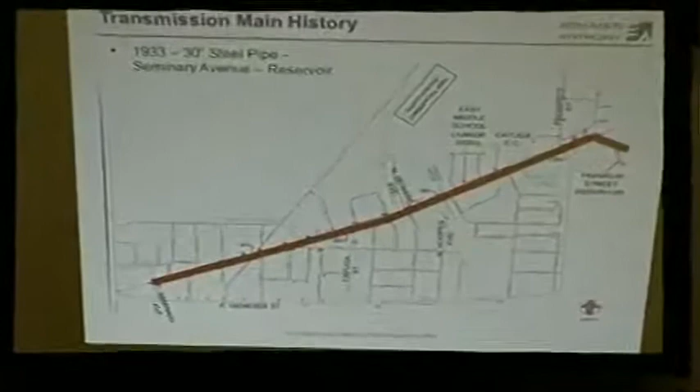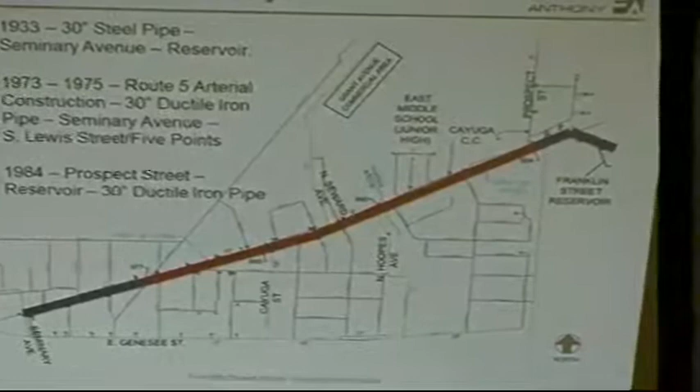Starting in 1933, there was a 30-inch steel water transmission main from Seminary Avenue to the Franklin Street Reservoir. In 1973 and 1975, the Route 5 arterial came through, and that segment highlighted in blue, from Seminary Avenue to Five Points or South Lewis Street, was replaced with ductile iron. The segment off to the east, in 1984 and 1985, from Prospect Street to the Franklin Street Reservoir, was also replaced with ductile iron. So remaining in the middle, the red segment, that's the project of today - the original 1933 30-inch steel water transmission main.

A little bit about your service area - it is not small. You serve the town of Sennett, Fleming, Throop, Brutus, Montezuma, Springport, Aurelius - the list goes on - Port Byron, Weedsport, Cayuga County Water Authority, Thruway Authority, all in total. I was a little quick with the button there, I think I can go backwards - pretty close to 45,000 people served.

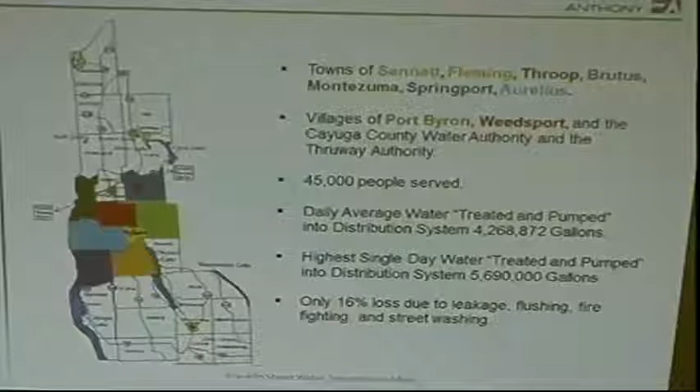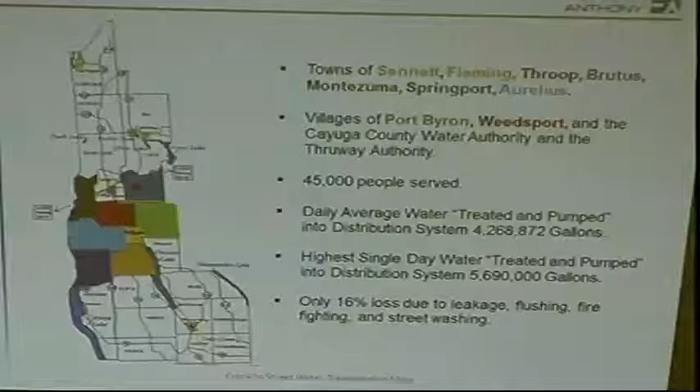On a daily average, you're pumping into the system a little over 4 million gallons a day, and in 2012 you had a peak daily water pumped into the system approaching 6 million gallons. One interesting fact - we deal with many water providers at Erdman-Anthony, some with losses upwards of 45, 46, 47, pushing 50 percent. The average is generally greater than 20% loss water. You're only at 16 - it's something to be proud of, that's a really good number, very good. Those losses are due to leakage, flushing, street cleaning, firefighting - really good number.

A little bit about the procurement schedule that Bill has operated under - it's really been pretty much at the speed of light. From the very beginning, with his request for proposal in April 2012, to where it was awarded to us in August, through construction.

During the scoping process, the City of Auburn Engineering Department requested that we consider rehabilitation alternatives, not just plain replacement. They wanted to make sure they were making the right moves, so they asked us to consider both, and we did.

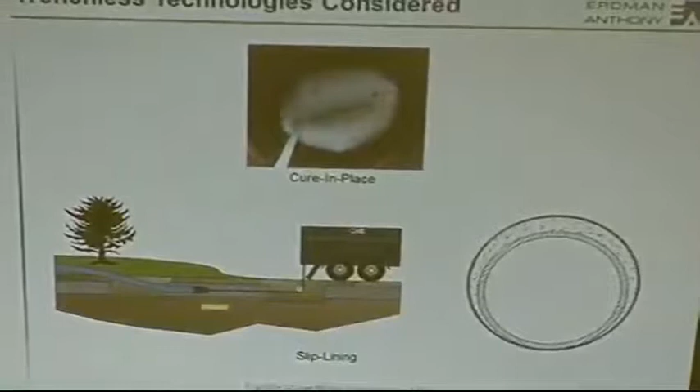On the rehabilitation side of things, when talking about a buried utility, the term trenchless technology comes into play. Basically, we're not digging to get at the pipe - we're doing it from above, from entry and exit pits. We considered two options initially. One was a cure-in-place option, which is basically a polyester fiberglass sock that gets essentially inverted and pulled through the pipe, then pressurized with either steam or hot water to cure it inside the host pipe - the host pipe being the pipe originally installed in 1933.

That option proved to be very pricey. There were some logistical elements to it. We didn't rule it out initially, but eventually we did.

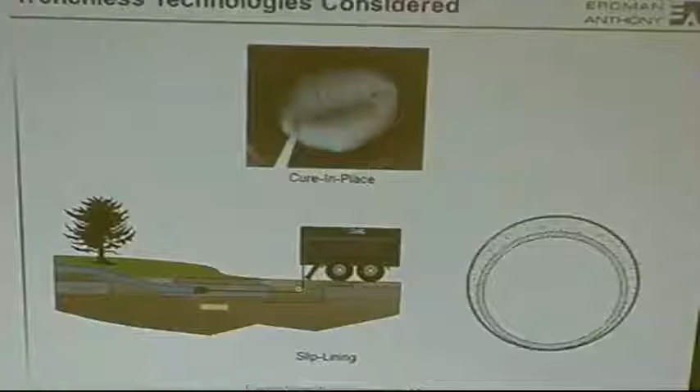The rehabilitation alternative we looked at more closely is called slip lining. We have a winch attached to the back of a vehicle, and the piping is assembled at grade and fused together. You take it from the surface down inside a receiving pit and pull it through the existing pipe. The cross-sectional view shows that pipe being pulled through the host pipe, with the annular space grouted with cement.

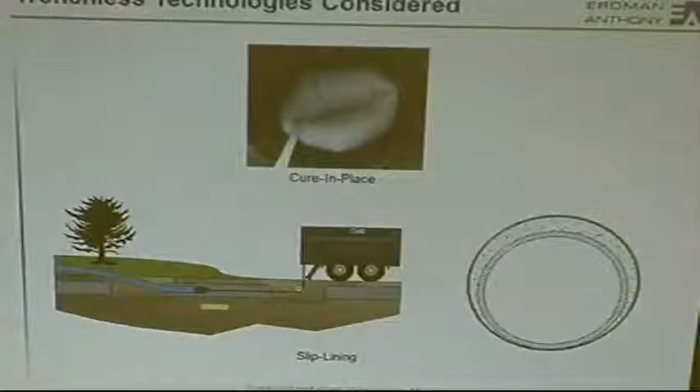Bill definitely wanted us to take a look at some different material options, and we did. We considered high-density polyethylene, HDPE. We considered ductile iron pipe, which is what we selected. And we also considered polyvinyl chloride, PVC.

HDPE we ruled out pretty quickly. The benefits of using HDPE come in a more rural setting. It's fused together in long lengths, could be 300-400 feet at a time, and either pulled or rolled into a trench. Down Franklin Street, given the numerous underground utilities that cross the trenches we have to navigate, we ruled that one out pretty quickly.

PVC we considered. There's pluses and minuses to all materials. PVC is one of the pluses, it's a little cheaper, but some people who manufacture PVC will argue with you till they're blue in the face, as blue as their pipe. It can be point loaded, and when it fails, it fails catastrophically. You get a small crack, it tends to go right down the pipe and could enter into the next stick of pipe. That's not the reason why.

There's many reasons why we selected ductile, but it's more important to talk about why. Number one, it's tough to beat. Number two, it resides on both the east and west sides of our project. The City of Auburn is familiar with working with it. Tommy Gayback and his guys have the necessary tools because they deal with it every day. I don't know if 100% of your system is ductile iron or cast iron now, but they're used to it.

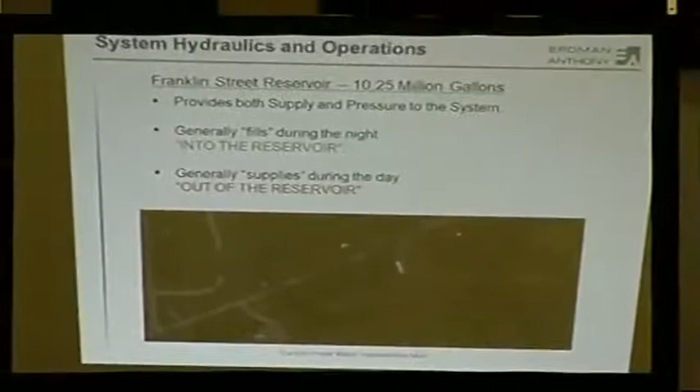A little more about your system. It's important to talk about the Franklin Street Reservoir. It is at the east of the project, at the city line. It's 10.25 million gallons in volume. It's important to note that that reservoir is not only a supply and storage of water, but also a source of pressure. It provides pressure back on the system.

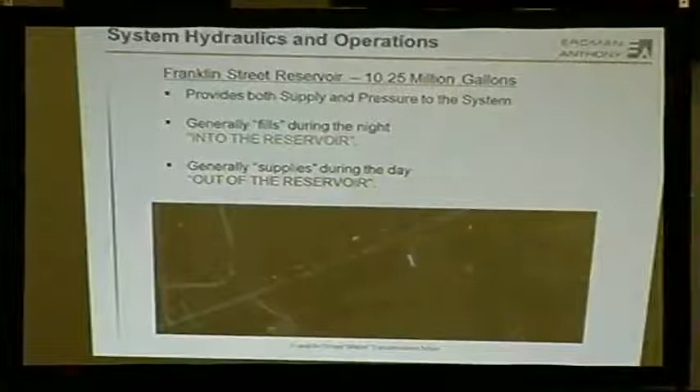Operation-wise, in its most simplistic form, at night it fills up. During the day, when water usage is greater, water tends to flow out of it. But there's only one pipe that hangs on the edge of that conduit, this 30-inch water transmission main, and it's bidirectional. It's water in and water out through the same line.

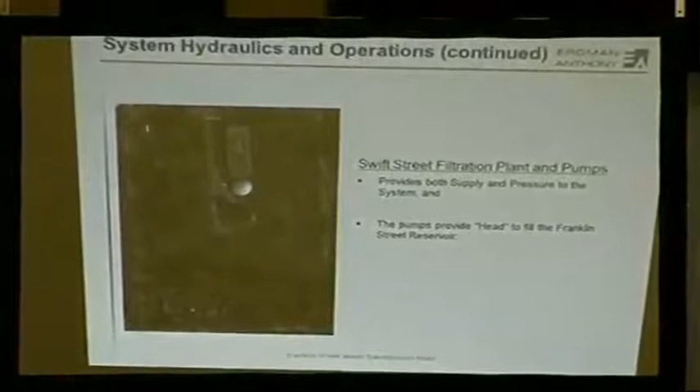The Swift Street water filtration plant and pumps is another important component of your system. What's important to know is that they're running 24/7. When they're not pumping water and it's being used, it's pumping water into the reservoir. That's the way the system was designed. Those pumps also provide pressure and flow to the distribution system and to the Franklin Street Reservoir, and provide the necessary head to pump water to the highest point in the system, which is the Franklin Street Reservoir.

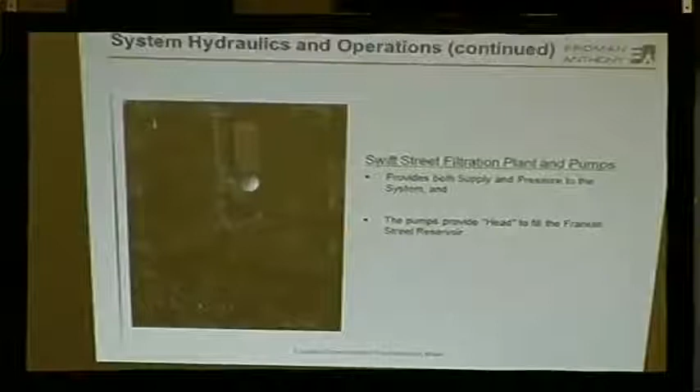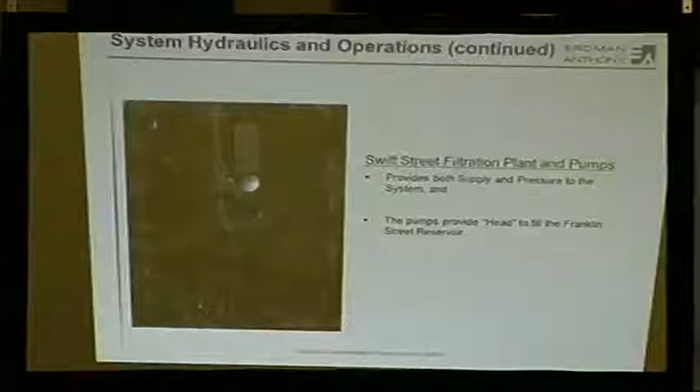Another important thing to note about the Swift Street water filtration plant and pumps is that because they can provide pressure, it does allow for maintenance or short durations when you can take the Franklin Street Reservoir out of the system and things still operate, with basically nobody knowing it's happening. So there's been some points in the project where we've asked Anthony DeCaro to change how he runs the filtration plant a little bit so we can shut portions of that transmission line down so we can work with it.

Throughout the design, we asked ourselves three questions often, and one additional that I didn't write down. How do we keep that Franklin Street Reservoir operational? How do we minimize its downtime during construction? And how do we continue to replenish the water in that reservoir? The fourth question, the one I didn't write down, is how do we rehabilitate a line, take it out of the system, and continue to flow water to that reservoir? I'll cover that more as we go.

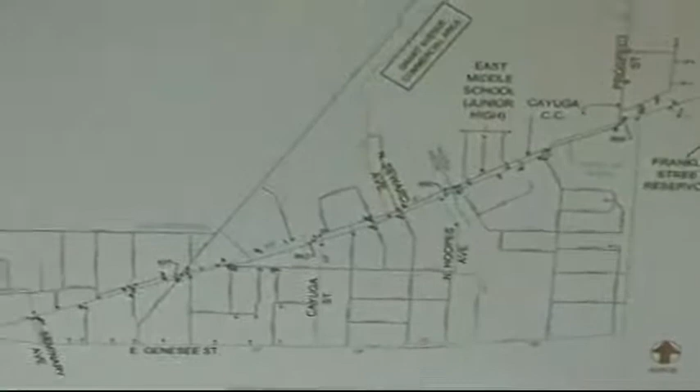To answer those questions, we did some hydraulic modeling of the system. If we need to rehabilitate the line, or take a portion of it out of service for an extended period of time, we still have to put water back in that reservoir on a daily basis. So we had to look for other pathways to get the water there.

The first pathway we looked at was large side street connections. North Hoopes Avenue is the largest and closest line to the reservoir, and it's 12-inch in size. So basically we said, let's not allow any water to go down the transmission main, let's only let water go up Hoopes Avenue. It wasn't enough, so we continued to look.

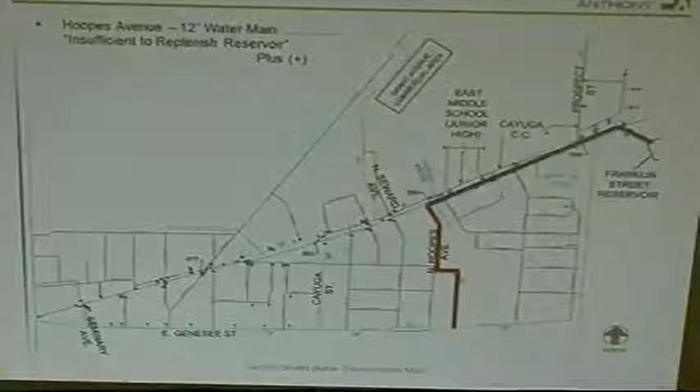The next largest main that hits the water transmission main in Franklin Street is North Seward Avenue. It's also 12-inch. The model said no good. It still wasn't enough, the two lines, Hoopes and Seward. So we continued to look.

And then we come to Cayuga. That's a 10-inch line. At that point, the model was yielding some favorable results. So that's important to the alternatives that we were preparing to evaluate.

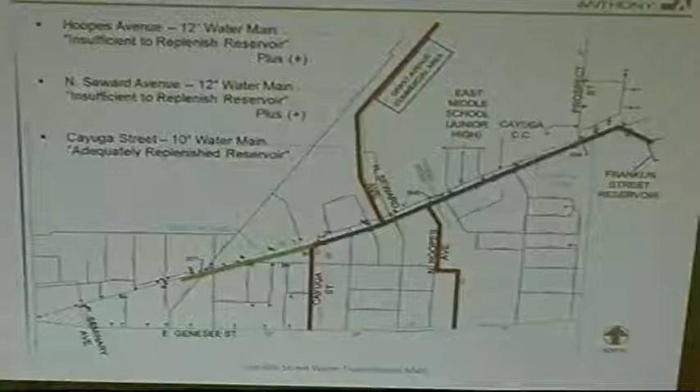Knowing that those three lines were sufficient according to our model, we knew that this last segment there in green, from 5 Points up to Cayuga, was the only section we really could consider for rehabilitation alternatives. The segment in blue would have to be installed new. The assumption is when you're installing new, you're leaving the old one there and using it while we're installing the new one and preparing it for use.

So I talked about the model a little bit. We like them, we like to think they're always right, but we know they're not always right. Whenever we get a chance to test them, we do. So that's what we did.

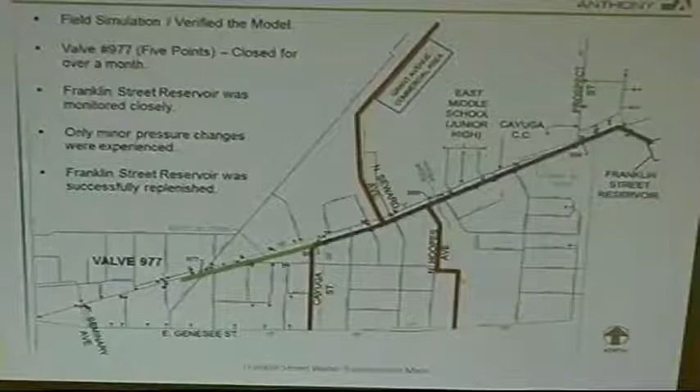We simulated taking that segment out of the system. We did that by closing valve 977, down there in the lower left - a 30-inch gate valve installed around 1974, 1975 when the arterial went through. By closing that, the green segment was out of the system. So now the filtration plant pumps kick in, the water hits that valve and has to find someplace else to go. We assume that water went to Cayuga Street, Hoopes Avenue, and Seward. We knew we had some help from the small 6-inch lines, but the majority of the water was assumed to be coming through that line.

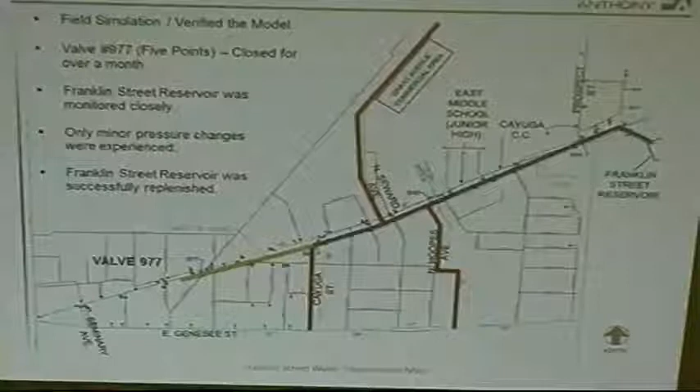So we asked Anthony, Tommy Gayback, and Bill to close that valve for us, and they were hesitant at first. I said, well, let's just close it for a day. So we closed it for a day, and things were okay. They said, now what? I said, let's leave it closed for 2 days. So we left it closed for 2, and 3, and 4, and then a week. Then we did 2 weeks and 3 weeks, and extended that to a little over a month. Anthony was able to make small adjustments, and he only saw minor increases in pressure throughout the system. So we were satisfied that if a rehabilitation alternative proved to be beneficial economically or for other reasons, we could be confident that we could actually do it and remove that segment from the system while we did it.

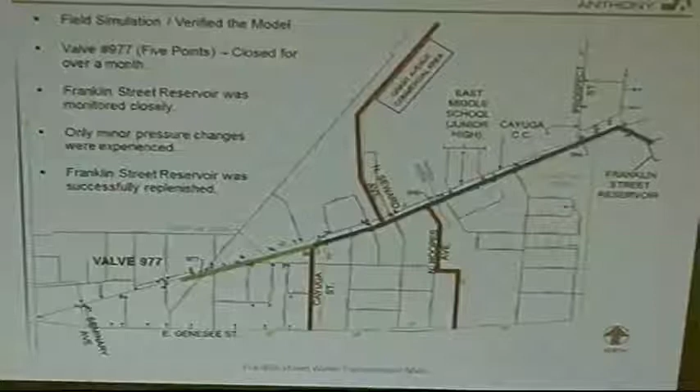So real quickly, we developed two alternatives. Alternative number 1 was new pipe from Cayuga to Prospect Street and rehabbing Cayuga Street to 5 Points. Alternative number 2, quite simple, new pipe all the way from 5 Points to Prospect Street.

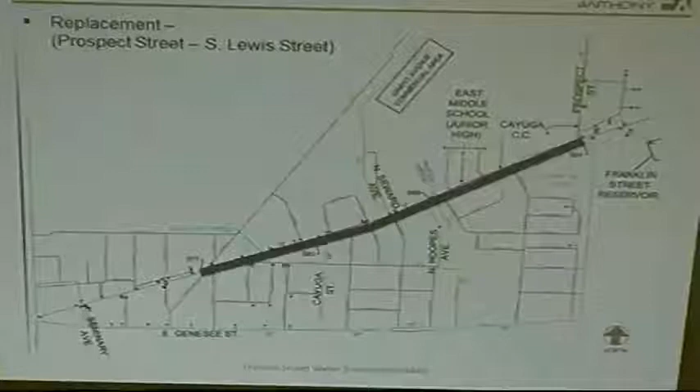We developed opinions of probable construction costs for each of those alternatives. Alternative number 1, with rehabilitation, was less expensive. Alternative number 2 came in at $3.865 million. The difference between the two was only $35,000, so we felt it was pretty much a no-brainer. Bill and his staff agreed: let's put in a new pipe all the way. For $35,000, let's get it new, let's not mess around with a rehabilitation alternative.

And that alternative came with the recommendation to use ductile iron pipe.

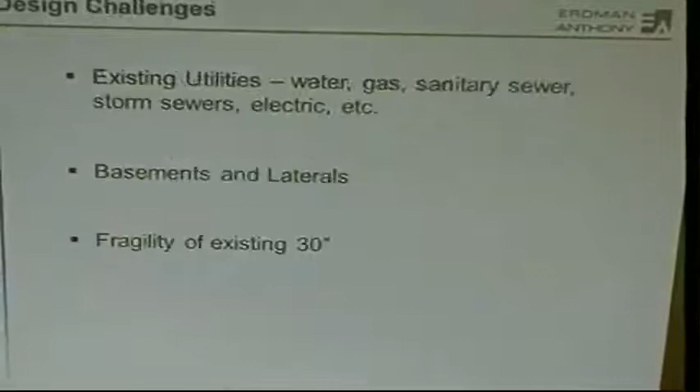There were some design challenges along the way. I don't want to spend a lot of time here, but existing utilities are everywhere, crossing our trench every 5 feet - water services, gas lines, gas mains, gas services, electric, telephone. Most of the electric and telephone were around the poles, but there was plenty of gas and water, and sanitary sewer laterals were a big concern for me from day one. I found myself in every basement along the north side of Franklin Street to locate them, to be as confident as I could be with where they were located, and made a determination of whether we could successfully install the 30-inch pipe generally within the Franklin Street pavement without disturbing them.

There were a few isolated laterals that I was nervous about, so we designed parallel sanitary sewers just in case. During construction we were able to navigate all of them, so the sanitary sewers we included in the contract proved to be unnecessary. We just dug a little deeper to get underneath the laterals, so we saved a few bucks there.

Another concern was just the fragility of the existing 1933 steel transmission main. You know better than me, but I did see it repaired firsthand on 2 occasions in the short duration I've been involved in the project, and I know it's been a headache, becoming an increasingly bigger headache as time goes on - the frequency of repairs necessary is getting more numerous each year.

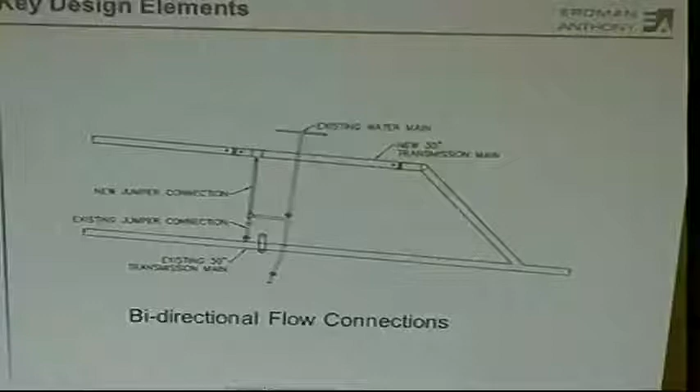So those were key design challenges. Here's a key design element that I think you'll agree is important. We call it a bidirectional flow connection. When we're installing the new main and we finally cut it over and connect it to the existing, we need the ability to quickly reconnect the side streets, and that doesn't happen in a day. So here in red, working from the text on the bottom, let's just pretend that that's Cayuga Street.

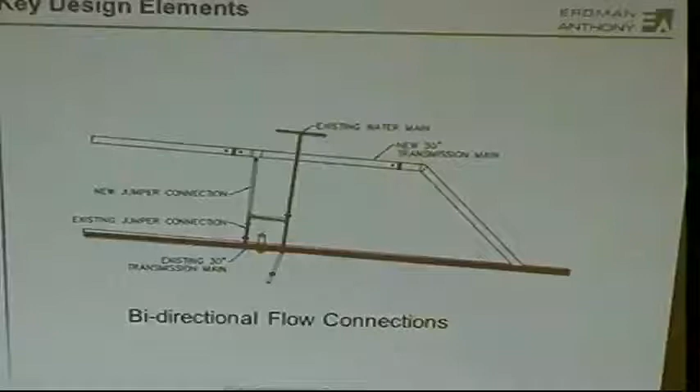Water's traveling from the bottom of the page up, and then it goes to 2 places: either to the water main on the north side of Franklin Street, or through the jumper connection, tying to the existing 30-inch steel transmission main. The piping referred to as new jumper connection, we prepared those connections prior to what we call the stage 3 cutover - that's when we actually connected the proposed to the existing at Prospect Street. By installing this jumper connection piping ahead of time with strategically placed valves, the water can quickly go the other direction and be on its way to the reservoir. We had 3 of these connections: one at Hoopes, one at Seward, and one at Cayuga.

There are 4 critical points that concerned me, that maybe I lost a little sleep over while it was happening. The first was installing the pipe only 7 feet away from the existing transmission main between Prospect and Marvine. We were prepared - we required the contractor to have repair materials should we rupture a hole in that line or have something catastrophic happen, to minimize downtime. But we installed that line from Prospect to Marvine with no failures, no leaks. So that was success number 1.

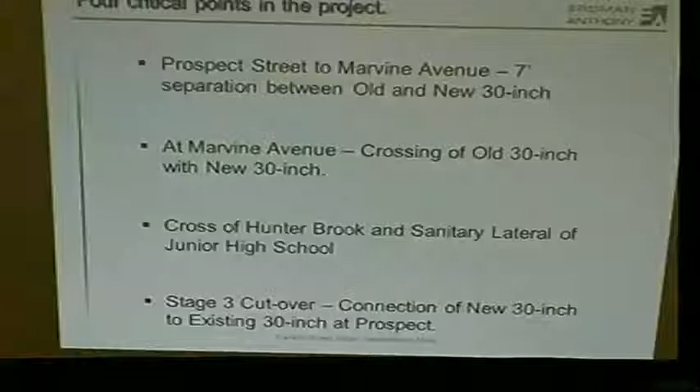Success number 2 quickly followed. At Marvine, the existing line travels from the north side of the Franklin Street pavement at a 45-degree bend, then 45s again and hops underneath the southern sidewalk of Franklin Street, staying there all the way to the church near Capitol. So crossing it was a bit of a worry, but we went under it, not over it. The existing line is generally buried 4 feet deep, and our proposed line is buried 4 feet deep to the top of it, but at that point we dove down deeper and went underneath it successfully. That piece of pipe actually looked brand new - we know much of it does not, because I've seen it firsthand with the repairs - but that section, you wouldn't know it was 1933, at least on the outside.

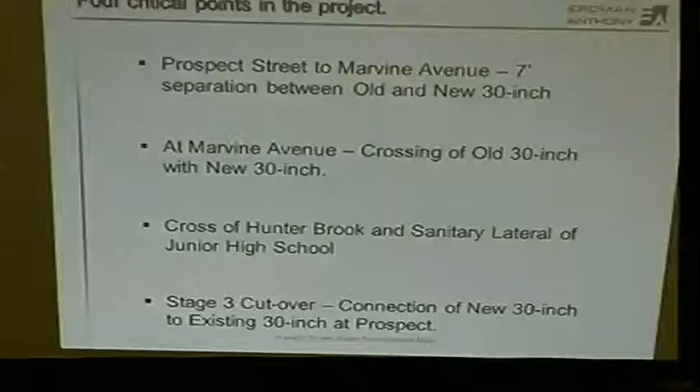The next critical point of the project was Hunter Brook. Anytime you're crossing a stream, river, or brook, there's concern. The existing line goes over the top of that box culvert at Hunter Brook, and so does the new one. At the same time, there's an important lateral to the junior high school that we had to cross - that was number 3, and we did that successfully. And then the last one, also done successfully, occurred on January 20th - what we refer to as a stage 3 cutover, the connection of the proposed to the existing at Prospect Street, or just west of it.

We can talk more about the details of that cutover, and I have some nice pictures of it. They were taken at night, since most of the work ended up being done at night. So that's a nice topic for discussion if you have questions.

Real quickly, I mentioned that Bill's got us moving at the speed of light, and it didn't stop from the beginning. We advertised for bid on July 15th, opened bids on August 7th of 2013. The council approved that construction contract on August 15th, and construction began this past November.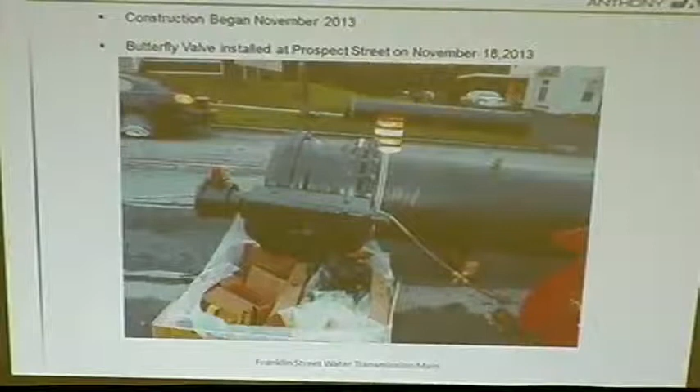And the first piece of pipe that went in the ground, the first accessory that went in the ground, was a 30-inch butterfly valve just west of Prospect Street. That is the butterfly valve there. If you can see it on the left-hand side, something that looks red - that's just to get you oriented. That's the nut that opens and closes the valve from the surface.

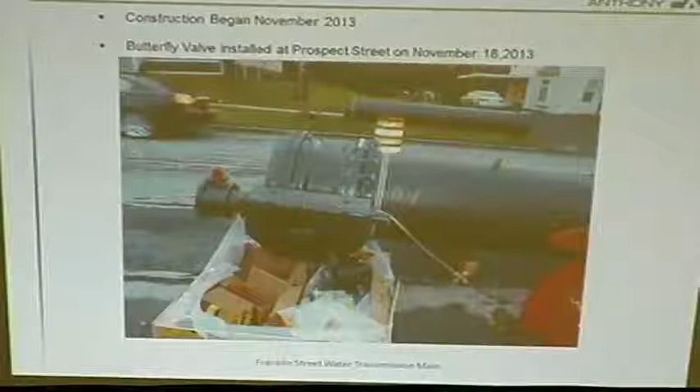We selected butterfly valves. They're substantially cheaper, but they work excellent - probably a third of the cost of a gate valve. That valve is attached to the first stick of pipe, and it nicely has number 1 written on it. A nice thing about the butterflies is they don't build up anything in the seats like the gates do. And another nice feature is there's not a bypass valve needed to equal pressure - you essentially get equal pressure on either side of the butterfly, so anybody can turn them. You don't have to be concerned about turning the wrong one at the wrong time.

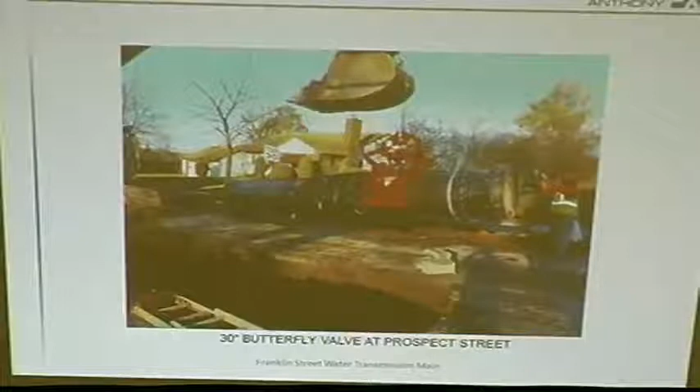So this starts a string of photos, and generally speaking they're in order, but no sooner do I say that than a picture will show up in the wrong spot. There's that stick of pipe - sticks of pipe roughly vary from 17.5 to 18 foot 11 or so in length, you might get one that's 19, that's just the way they're fabricated. But there it is, being lifted into place just west of Prospect Street.

Hopefully these pictures are showing up for those of you in the audience - we can always come back or look at the presentation later, I can leave it behind. This photo is looking easterly, and we're probably 3, 4, maybe 5 sticks into the work at this point, and there's another stick being set into place.

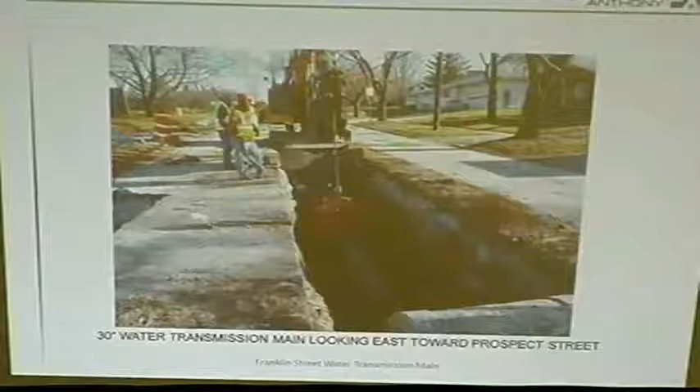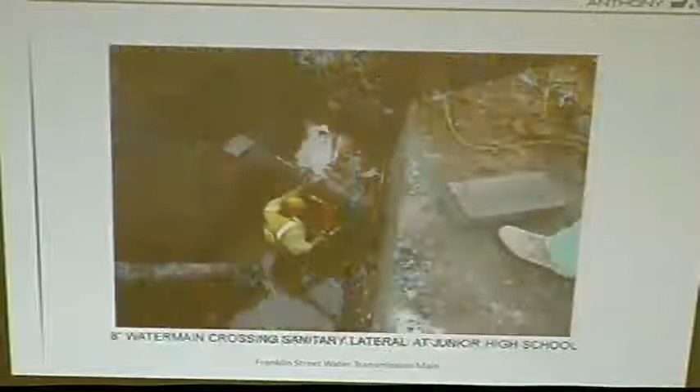Here's a photo that's slightly out of order, but we had to include it. This is work that occurred earlier - the crossing of Hunter Brook, but it's not the 30-inch transmission main. We had to relocate the existing 6-inch water main to make room for the transmission main, and we replaced that section of 6-inch with 8-inch, then connected to the existing 6-inch on either side. When we did that work, it also had to navigate its way by the lateral for the junior high school. That's what's pictured here - it's a little hard to see, but that guy's got his hand on the sanitary lateral coming from the school, and at his back is the water main that's angled 45 and down to get adequate bury and adequate clearance between the two pipes.

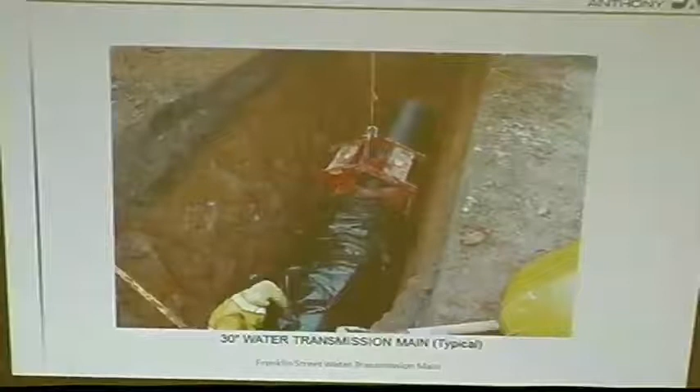I apologize, not a real exciting photo, but a stick of pipe is a stick of pipe, and this is another stick of pipe. It is 30-inch, and I can't tell you exactly where it is, but I think it's somewhere around Marvin.

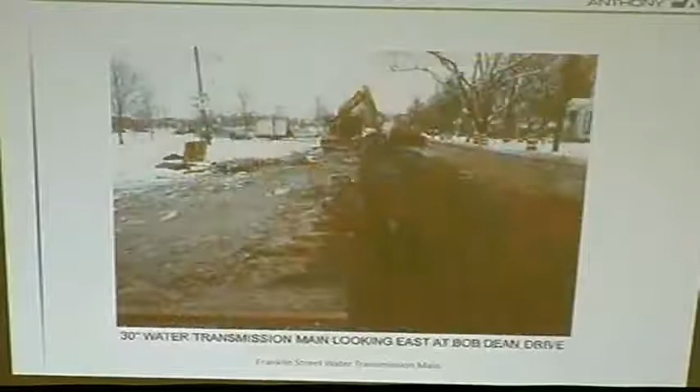We've had some weather conditions to deal with - you can see as the snow comes and goes. But again, we're in the vicinity of the college, and we stay in front of the college for a little while. They've got a few parking lots there, so some of these photos are - well, this one's labeled Bob Dean. Right there on the left is Bob Dean Drive.

And in the background of that photo, we backfill the trench with sand around the envelope around the pipe, then rather than change materials, from the top of the sand which is buried 1 foot above the pipe, we come up with crushed stone. That's the material we'd use for subbase under any driveway or roadway pavement, and we take that material all the way up through the subbase of the road, which the asphalt will be placed on top of. That's what they're installing there in the background of that photo.

And boy, the guy in the trench is disappearing, but he's in there and looks like he might be installing the next rubber, the gasket inside the pipe.

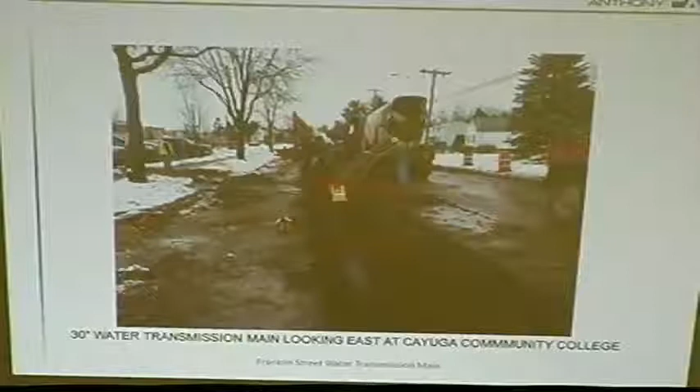Again, we're still at community college, but now we've got a concrete truck in the photo. Anytime we're closer than a standard distance to a storm or sanitary sewer, the contract requires that the pipe is not only wrapped in polyethylene, but the joint is also concreted and fully encased if we're closer than standard to a storm or sanitary line. That's what's occurring there, and I've got some close-up photos of that. Not too exciting, but that's what's happening.

I mentioned we have lots of utilities crossing. They're standing on top of the new 30-inch that's poly-wrapped and at least a third of the way backfilled, and dealing with what's probably a gas line that maybe was staked out inappropriately. At any rate, it looks like they're fixing one that was broken on their way by.

Just to get you oriented, at this point in the project, we're at Hoops Avenue.

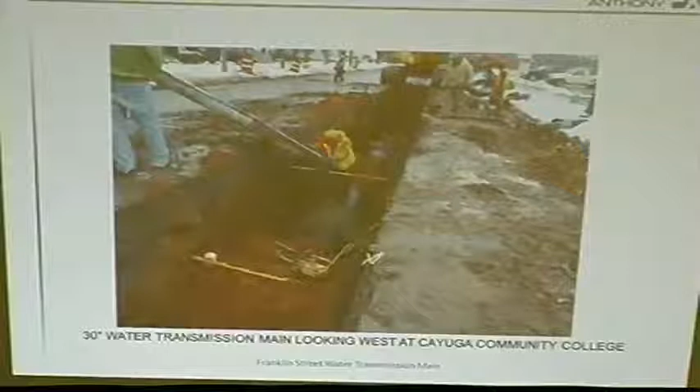Production's really been very nice for the city, for the contractor, for Urban Anthony on the design side. I'll tell you what my guess was: 80 feet a day. I know what the contractor's guess was: 100. They've had days that exceeded 160, 180. I think their average is somewhere between 140 and 160 feet a day. So things have really gone very nicely as far as installing lengths of pipe and getting good production. That's a really good number.

May not feel like it as we drive down Franklin Street, but things are actually progressing very nicely.

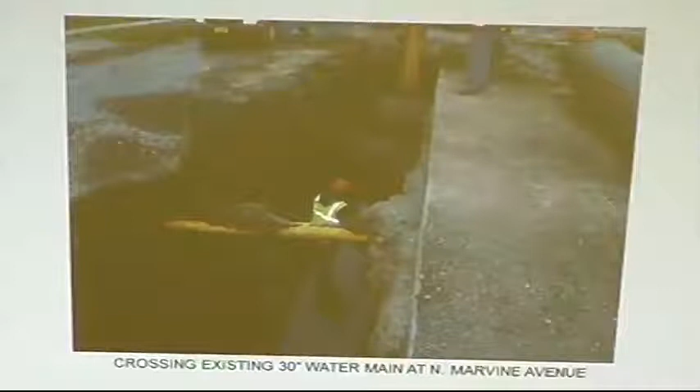That's not a good photo, boy. It looked a lot nicer on my laptop. Just in front of the bucket of that excavator at the top of the photo, this is the crossing of the existing 30-inch with the new 30-inch at Marvine. You can barely make it out in that photo.

There's just a concrete joint, fully encased in concrete. They don't backfill those joints until that concrete is there, and we vibrate that concrete to make sure it gets down and fully under, to make sure that joint is fully encased. The idea is additional protection from potential contamination from a storm or sanitary line. It seals and stabilizes.

Stage piping at the school. I don't know for certain, but I think that valve is potentially a service valve for the school. The school is the only customer connected to the transmission main, both the new and the existing, and there's two of them that basically loop into their property. So we maintained the only customer that was serviced from that transmission main, which is the school. Everyone else is off the water main, including the college, and they have a second feed, I believe, on Prospect Street.

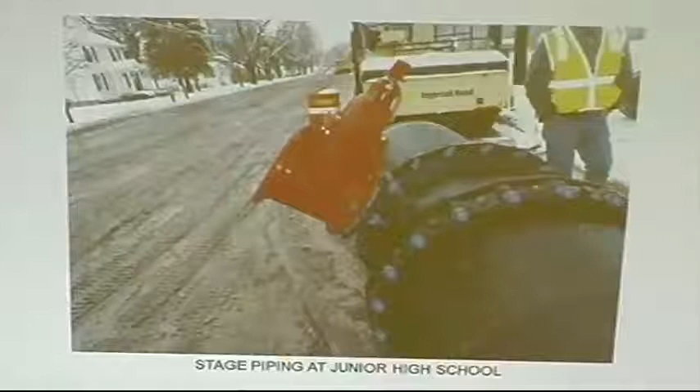Again, we're near Seward, a little past Seward I think at this point. The trench is more typical, right around that 4-foot depth. We're backfilled with sand here, waiting for the next stick.

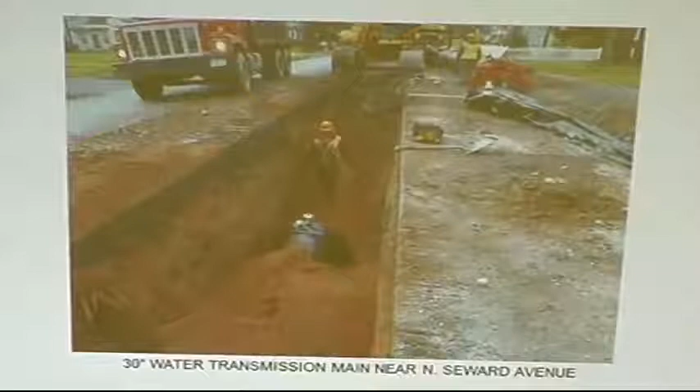Now we jump a little bit, but not too far - this is right at Cayuga. The next photo shows a stick of pipe that they assembled ahead of time before setting it in. There are some benefits to doing that - it's a lot easier to turn 20 bolts. Every joint has 20 bolts, I should say, if we're restraining the pipe. We also use pipe where there's no bolts, where it's just push-on - you simply push them in and you're done. But when we have fittings, bends, or valves, they get restrained, and there's 20 bolts around there, and it takes a while to put them together and tighten them up.

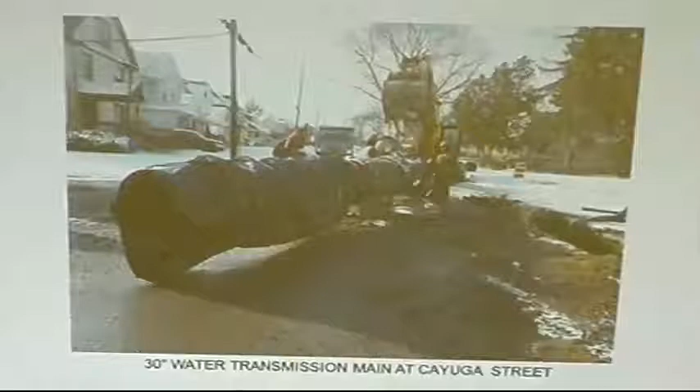We're still at Cayuga, looking westerly here. At the top of the photo it's hard to make out, I wish they were coming through a little better. But we're looking west in the trench, ready for that piece of pipe we just saw laying there on the left.

We're preparing, and you'll see it in the next photo, a 45-degree bend and then a partial stick of pipe, because we're heading over to the south sidewalk where the existing line is. From Cayuga to 5 Points, we're installing the new 30-inch line in the same exact spot as the existing one. So this is that length of pipe between Cayuga and 5 Points that we could have rehabbed.

So similarly, we don't need it, and we don't have to be someplace new. We can be right in the same spot. There are two big benefits that come with being right in that same spot. Number one, we know it's going to fit. There's nothing in the way, although we'll probably hit a water service and maybe nick a sanitary lateral along the way. But there's nothing in our way. That's one real nice benefit we realized by doing the analysis early and proving we could take that segment out of service.

The second benefit of being in the same place is we don't have any substandard separations from storm or sanitary sewers. So it should be unnecessary to concrete any of the joints from here to 5 Points.

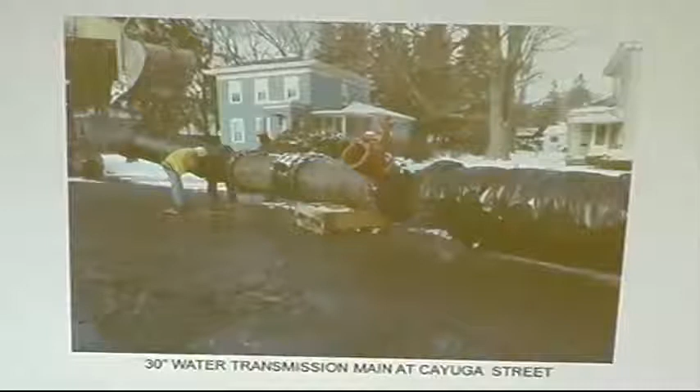That's probably the best picture I have that shows that bend. Now you're looking north-westerly, and the guy with the orange vest is right on the 45-degree bend, so that stick of pipe is in the ground today, ready to be extended across the rest of Franklin Street, underneath the southerly sidewalk. And that 10-inch valve in red-orange is where the bi-directional flow connection for Cayuga Street would connect.

And here we go for the fourth critical portion of the project, which we refer to as the Stage 3 cutover. In this photo, you're looking westerly, just west of Prospect Street.

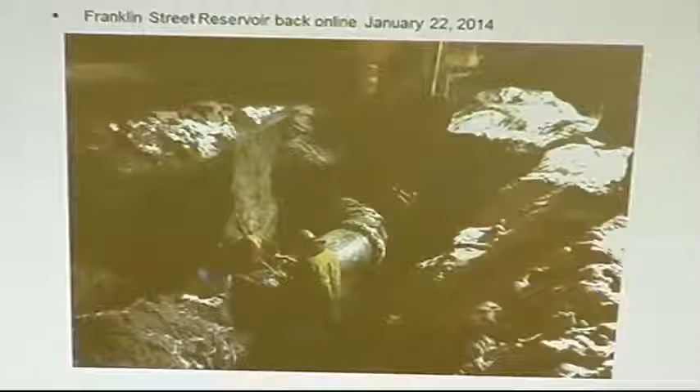In the lower left is the existing ductile iron pipe we're connecting to. The guy in the yellow vest is working on a solid sleeve, basically a coupling that connects two pieces of pipe together, in this case the old to the new. To his right you can see a short stick of pipe, and it's hard to see, but there's the first 45-degree bend right there. It bends 45 degrees to the south a little, where it'll be mated up with another piece of pipe and another 45-degree bend to connect to the new transmission main.

Just another shot, the night photos are tough. It's the same view, just a little closer in. Same view, just a little later, and we're a little closer to actually making the connection at this point.

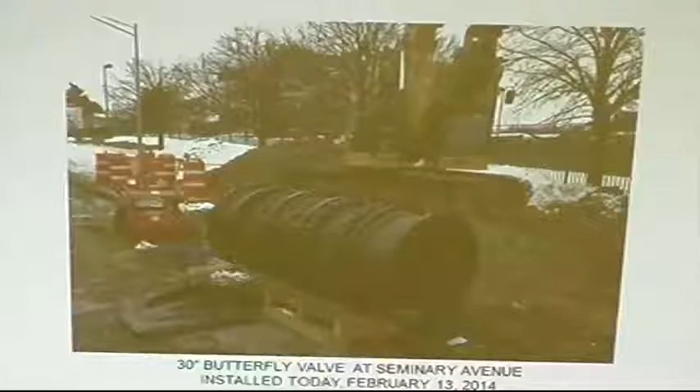And this photo brings us right up to today. The job has been very smooth from a construction perspective, we really haven't had many hiccups, but we have had some. One of those was valve number 977, I'll never forget it, at 5 Points. It leaks, and it's caused some heartache.

We have an extra valve in the contract, and we're making good use of it at the intersection of the arterial and seminary. We made use of it today, I took this photo earlier. This is two solid sleeves and a 30-inch butterfly valve, which we cut in on the ductile iron pipe installed in 1974, 1975 when the arterial went through.

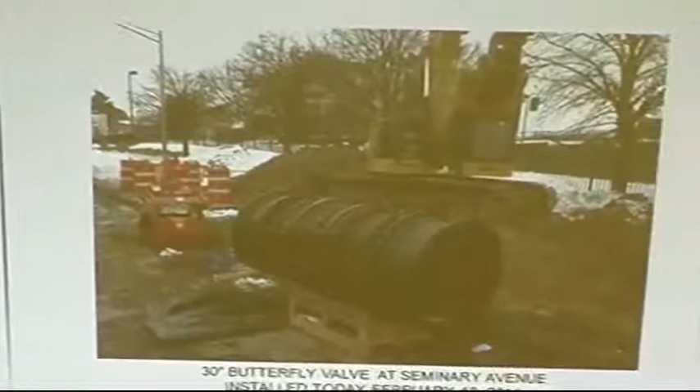There's no valve down there, which is why I say we're making good use of this extra valve. Now it's serving two purposes: one, it gives Tommy Gayback a way to control his system better, and it's also going to allow us to quickly remove piping just east of 5 Points on the east side of valve 977 that leaks. So now that this valve is installed, we'll be able to shut it and stop it from leaking, finish our dewatering, and continue installing new 30-inch pipe from 5 Points up to Cayuga Street.

That valve number 977, if I understand you correctly, that's leaking. Will that be replaced, repaired, or will that eventually be out of the system?

We're going to remove it from the system. That wasn't the original plan, we were going to connect to it and leave it in the system and install a new valve about 5 feet away. So instead we're going to remove it, add a little pipe, and put a new valve as planned right there.

So the leaker will be out of there then? It'll be out of there, okay. And while we're removing that valve, we're also going to remove what we call a dresser coupling and a couple of short lengths of pipe, which are always good to get rid of. They sit just west of that valve, at the leak points.

So at the moment, we're calling that Plan B. Part one of Plan B was executed today successfully inside of 4 hours, which is worth noting. We had hoped the State Street cutover, the actual connection of the pipe, would have happened in 4 hours. That was the plan. It took longer. Things don't always go as planned, but sometimes they do—today we planned 4 hours and got it done in 3.5. So it was a good day.

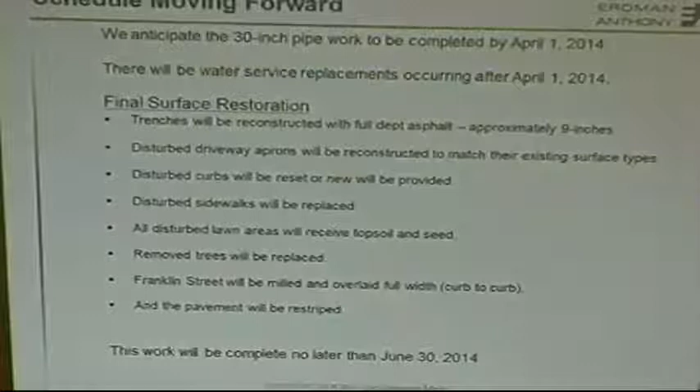Okay, we're almost to the end, and now it's time to talk about where we're going from here. The next move is essentially to install new 30-inch pipe in the same place as the existing pipe, from 5 Points to Cayuga Street. Right now we anticipate that work being done by April 1st, and we anticipate it starting, with a little luck, with a permit from the DOT within just a few days—maybe the middle of next week.

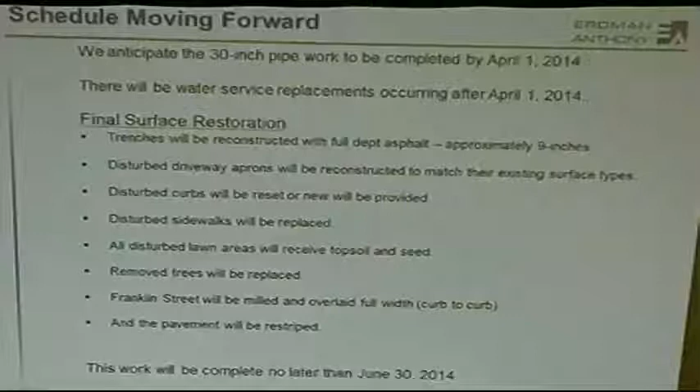Right now the plan is to start at 5 Points and work our way up to Cayuga Street, and it looks like we'll be done with that by April 1st. After April 1st, essentially all the big pipe is done, and then it's just the small stuff—going from 30-inch down to 3/4, 1 inch, and 1 1/4. There's some galvanized and lead services that tap the water main within the street.

And Bill, like he always insists, let's do it right—it's not right to leave those lead services in there even though they're not causing trouble. Let's replace them with copper. So that's what we're going to do. We'd anticipate that type of small work continuing after April 1st on the water side of things. So you're replacing all those lead whips? Yeah, lead services and galvanized services. There's not that many of them—if I had to guess from memory, 17 to 20 in total, with the remainder already being copper.

And then what's left is final surface restoration. The construction contract carries us to June 30th. We hope to be done prior to that, but that's when we will be done by, at the latest, June 30th.

And what will we be doing? Well, when the weather cooperates with us a little bit, and it will soon, one of the first things we'll be doing is getting in to restore all the trenches. We'll restore those trenches with full depth asphalt—that's a pavement section that matches the street, about 9 inches worth.

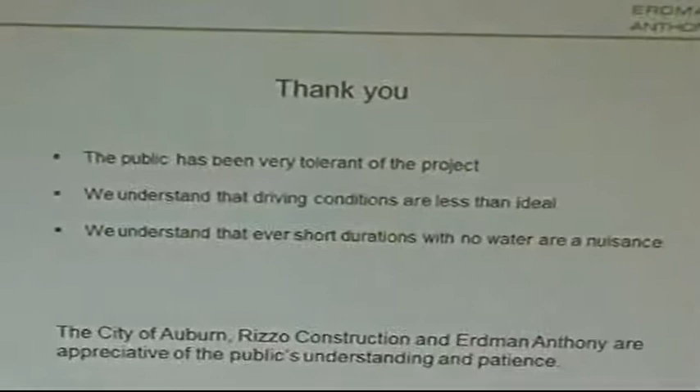Martin is a tough act to follow, so I'm not going to be quite as in-depth as he just went through with our Franklin Street water project, but I'll definitely do our best. Since our Director of Municipal Utilities isn't here tonight, I'll try to cover her system to the best of my ability. Anthony is here tonight though, so if you have technical questions about components of the plant and pumping station we'll be looking at, he's here to answer those.

Martin did a good job of stealing a lot of my thunder tonight. So just really briefly, for our new councilors especially, where are our major facilities—Martin talked about our distribution system. What I wanted to do tonight was prime council and let you look at sort of the brains of our operation, the pressurizing of the system.

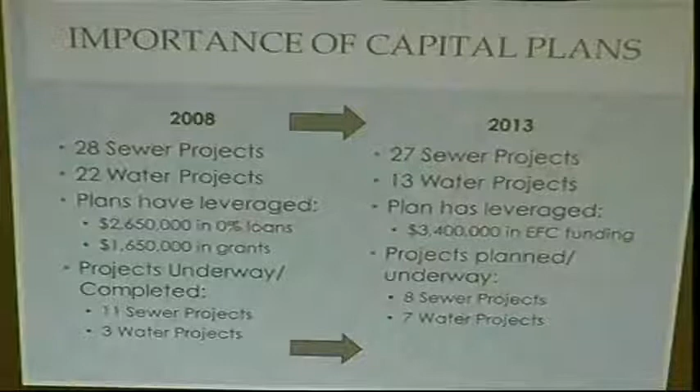Right now we're eligible for subsidized funding from EFC for these projects. We also have an application in for 0% financing through their hardship waiver program. But in order to utilize this financing, the city has to complete the bond resolution, environmental review, an engineering agreement, as well as our financial application to the state by March 1st.

This is their hard, fast deadline for drinking water projects, and it would allow us to access the funding allocated in the 2014 intended use plan. If we miss this date, we'll have to wait a whole other year before we're able to access those funds.

Now, that's not to say we can't do some of these projects on our own, but that would be through municipal financing and not through a low interest rate, or potentially even grant funding that we could get from the state.

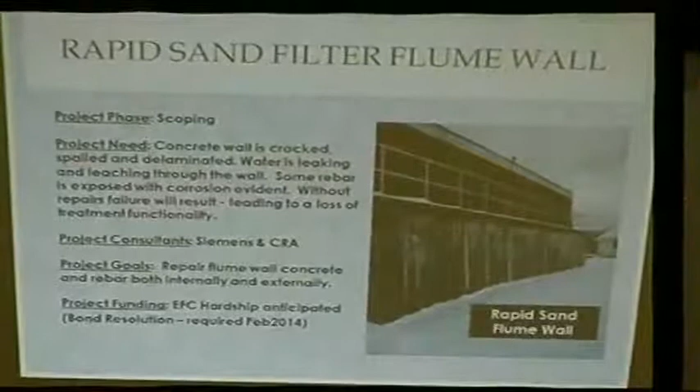So really briefly, the projects included in that application: at the water filtration plant, the rapid sand filter plant really requires the majority of our critical improvements at this point. The flume wall that's labeled there—you can clearly see it's spalling, severely deteriorated, and at this point really needs to be repaired. We need to work on this very quickly. We want to make sure we avoid any type of untimely shutdown at the plant.

Also at the rapid sand filter plant is the vacuum priming system. This system is for the low lift pumps and the backwash pumps. It is aging and requires a lot of maintenance. Failure of the priming system would basically result in the plant's inability to run the pumps and would cut off the city's supply capability. The recommendation at this point is to replace the existing priming systems with similar skid-mounted units. There's also a priming system at the upper pump station, so that's one of the projects that would also be completed at that location.

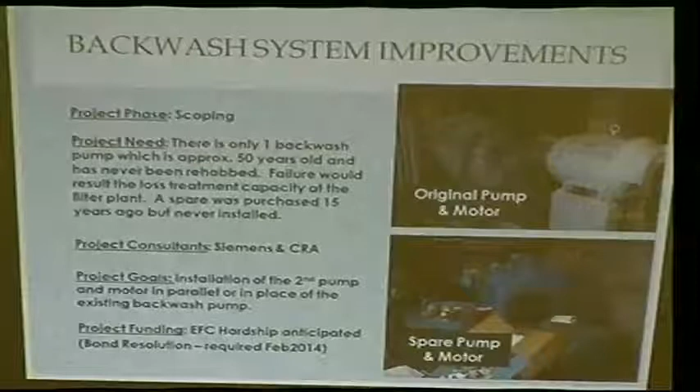Also at the rapid sand filter is the backwash system. That backwash pump, labeled original pump, is original to the plant since 1969. We have purchased a backup pump, which currently sits idle.

Without that redundancy installed in the system, a pump failure would cause severe problems at the plant. So what we're looking for is to remove the original pump, refurbish it, install the backup pump, and potentially look at a parallel system. That could be expensive, so we'll install the new one first, then through engineering analysis determine if a parallel system is feasible.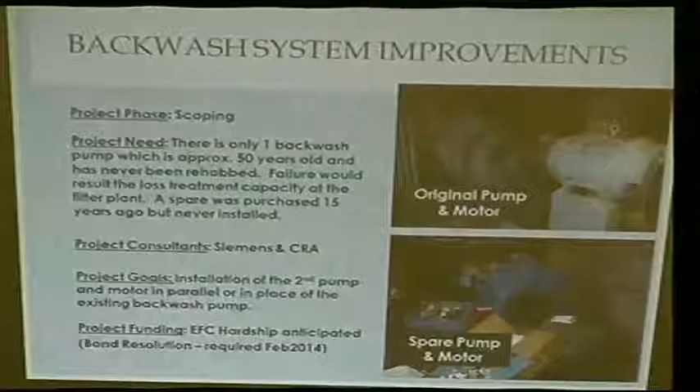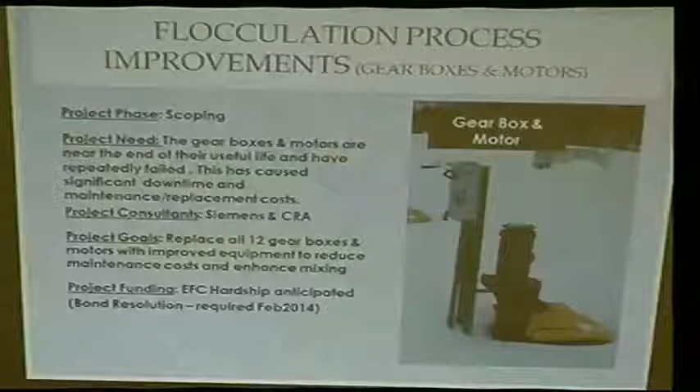Also at the filtration plant, the flocculation and sedimentation basin is used to remove turbidity from the water upstream of the rapid sand filter. At that facility we have 12 flocculation motors and 5 rapid mix motors. These motors are more than 12 years old and are failing on an increasing basis, causing increased maintenance costs. That's something we're looking at replacing.

Their counterpart, which with most of our motors and efficiencies these days, are the VFDs. They've also exceeded their useful life and are critical to the operation of the flocculation and sedimentation basin, so we're proposing the replacement of these as well.

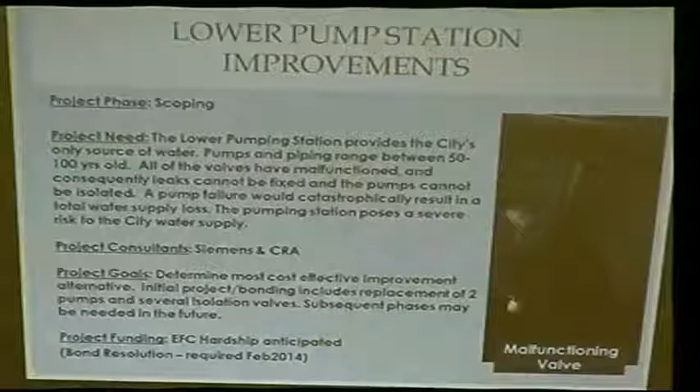Alright, lower pump station - this is the majority of the project. We just talked about the scale of the Franklin Street transmission line project. The lower pump station, even though it's a small facility, shouldn't be looked at any less. These pumps are truly critical to the system - they pressurize the entire system.

The pumps there - there's 3 currently, 2 of which date back to 1968, 1 from 1929. They're high service pumps and feed the entire system. They have not been rehabilitated or refurbished ever. Due to their age, there's a lot of inefficiencies and their probability for failure is fairly high. The loss of any one pump could cause a loss of system pressure, and regardless of water quality, if you don't have a pressurized system, no one has water.

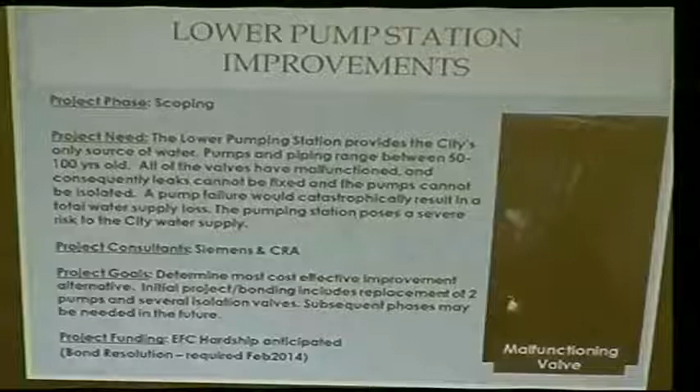Along with the pumps, also at the facility there are 10 isolation valves. The city isn't sure, but we're fairly confident none of the valves are operational at this point. If there's a major problem at the facility, we have no way to shut it down or isolate any part of the pumps or facility. These valves are fairly large, similar to the ones you've been seeing, 14 to 24 inches.

At this point we're recommending the valves, and a lot of the pipes where we're having problems, also be replaced. One issue I wanted to bring up is we have engineering estimates as to what needs to be done at the facility, but we haven't done a full-scale engineering report yet - that's what I'll be bringing to council next week for approval. Once that report's done, we'll want them to look at alternatives for the facility.

There's a lot of abandoned pipes in the pipe gallery, close quarters to work in. We may run into major problems, and it may not be as simple as an in-kind replacement as we hope the project to be. There's been schools of thought ranging from a complete replacement of the facility all the way down to just replacement in kind if we're that lucky. As we do the engineering work, we'll keep council apprised of what's going on and let you know if the scope of work is going to change for that part of the project.

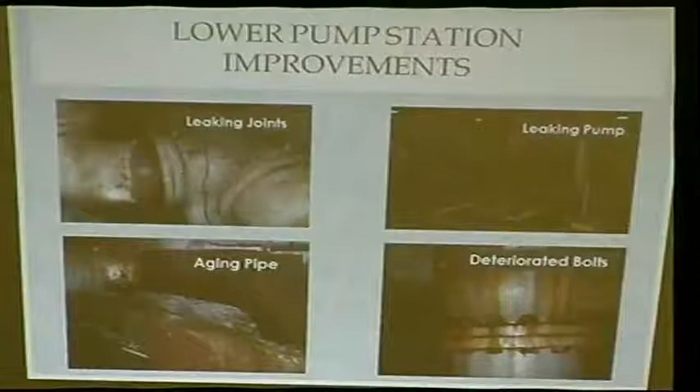That's why we would come back to you and have a talk about potentially amending a bond ordinance if we needed to. We do the best we can when looking at initial estimates. So why don't we do the engineering work first and then have a bond ordinance so we know the total amount we're going to be bonding for?

If I want the engineering work paid for with 0% financing, that's why we're doing the work now. I'm trying to get the financing in place so we're not paying interest on any part of the project. There's a possible deadline you're trying to meet for the 0%. Right. And when's that deadline?

That's March 1st. How come we didn't do this engineering work ahead of time if it was anticipated? We've been working on this for years, truly. I understand, but if you think there's additional work that needs to be done, how come we didn't do that engineering work ahead of time?

I understand, but we don't have an answer as of now. No, we don't. So until you actually do that full-scale engineering report, you're not going to know. And I guess my question is, why didn't we do this ahead of time so we know?

Especially with this opportunity. I'd like you to be more specific. Christina just asked about additional engineering with this project. Right, how come we didn't do that ahead of time is my point. That question I can't answer.

I've been making requests for this pump station for at least 5 years. I took over responsibility for it in 2007. So who's got an answer for it, then, that I should be asking?

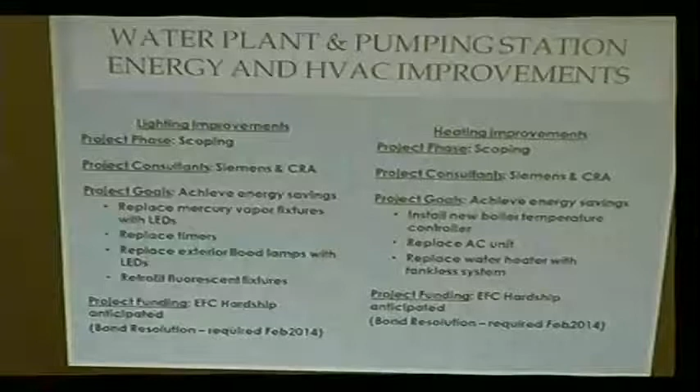And then we talked about taste and odor issues with the system—two very minor evaluations we want to do. One is looking at the disinfection byproducts within the system, and then also a taste and odor evaluation of the water and what we could potentially be doing to address that, due to the blue-green algae blooms we receive in the summer months.

All right, funding for the project. This past year the city passed a water fund budget of just a little over $4 million. The water fund currently has an annual debt service obligation of about $270,000. We're proposing a project of about $3.4 million. Working with our fiscal advisors, we ran some numbers and debt service schedules to look at our different financial options. Obviously, working through EFC and applying for that hardship waiver status is our best opportunity and would be the least costly to the city and the ratepayers.

If for some reason we weren't eligible, we are eligible for subsidized funding—that would be our next best option. Then taking a look at their pool financing versus our bond rate, market rate financing, because of our status—I think we're a AA1 community for bond rating—we're very competitive at our own bond municipal rate versus EFC's.

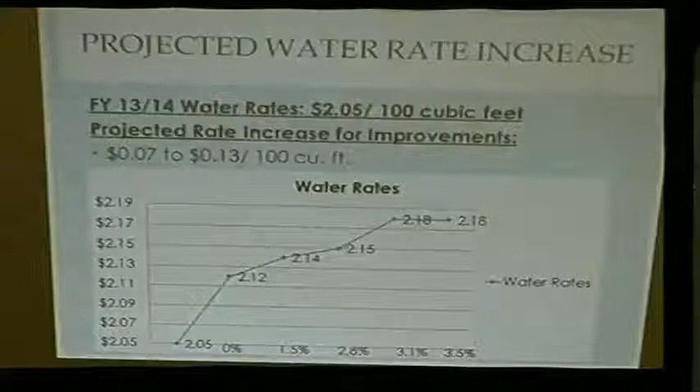That's why, trust me, staff really wants to meet that March 1st deadline this year, mostly because some of these projects just can't wait any longer. The Department of Health has put them at the top of their list, and some of them need to be done simultaneously to take advantage of the facilities being down. So like the backwash and priming systems, and then the wall at the Rapid Sand, really need to be done at the same time. That's why making sure we have large financing in place to do these major projects all at once makes sense.

And just a very quick look at potential impacts to water rates. Our current rate for this fiscal year is $2.05 per 100 cubic foot. What we're looking at potentially ranges depending upon the mechanism for financing we're eligible for. So that 0% is at the low end, which would have a rate impact of about 7 cents per 100 cubic foot, all the way up to 13 cents depending on if we had to do our municipal bond rating for the project. This would come into effect probably fiscal year 17-18, when we'd look at needing to do the rate increase. The nice thing about working with EFC, if you're eligible for hardship, is there's no principal or interest payments for their short-term financing, their 3 years. So we get access to their money, do the project, and close in long-term after those 3 years.

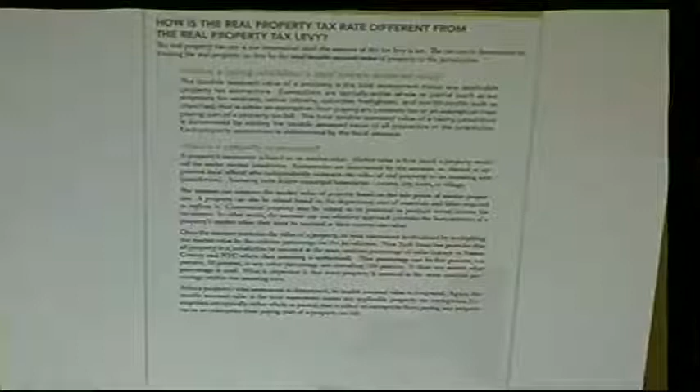Here on this page, it gives a very understandable overview of what the real property tax differences are between tax rate and levy. Again, on this slide, it talks about how it's determined and how a tax rate's calculated. It makes clear that the tax rate is a function of the tax levy, and the tax levy is the controlled part of the tax levy cap.

And it does give two clear scenarios. Scenario 1, which is where we are, with an increase in taxable assessed value, and scenario 2 is what happens when the taxable assessed value decreases. But since we're more into scenario 1, I think that's where most people find of interest.

And this is just a summary here of what it covers, and again, it's very well written. I would highly recommend that everyone pull this off the net. And the address was on the first slide.

So what I did is I came out and did some examples of what this is really about. In scenario number 1, and I believe I used Doug's numbers here, we're looking at a 2% nominal increase on our tax levy. The city's 2013 levy was 11.8, and the 2% increase brings it up to about 12, a little over 12. And there's an increase in revenue based on a nominal 2%, which is about 236.

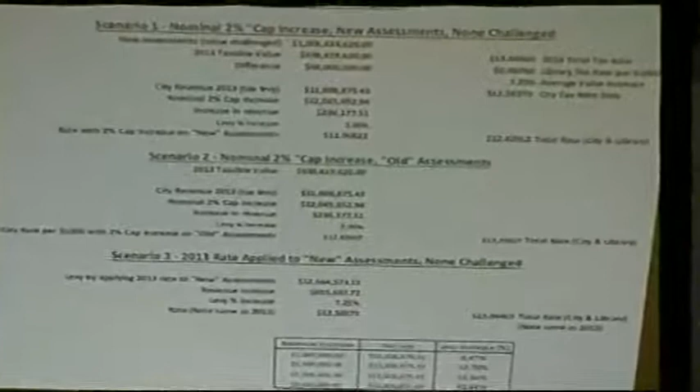So doing the calculation, the rate, if none of the new assessments are challenged, the city rate becomes 11.9682, and then now with the total city rate with the library is 12.42912.

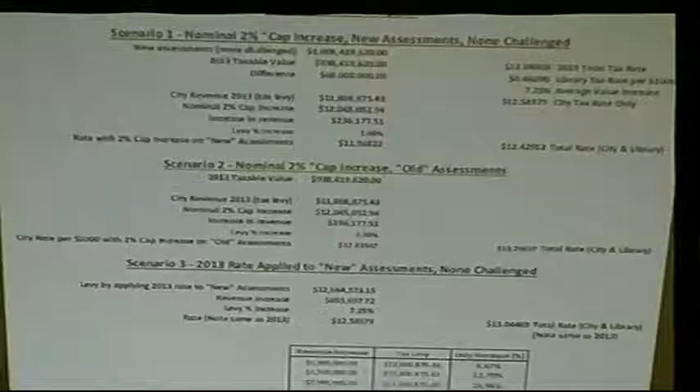Now scenario 2 is the 2% tax increase with the old assessments. You can see the increase in revenue is the same, the levy increases at 2. However, the rate, because of the distribution over a smaller assessable value, is now 12.83547, and the total taxable rate with the city and library is 13.29637.

The rate is calculated by dividing the levy by the assessable value, and times 1,000, that gives you the rate per 1,000. Now, scenario 3 is the 2013 rate applied to the new assessments with none challenged.

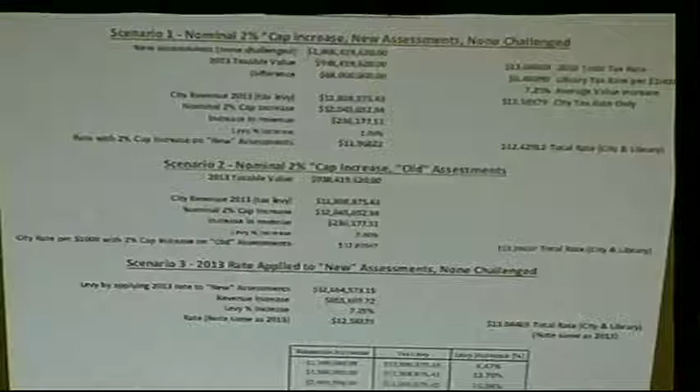This is kind of a misnomer, and if you look at it, the revenue goes up by 855K. And if you look at the percent levy increase, that's 7.25, and that's very likely to be over the tax cap. But you notice if you look at it, the rate is calculated, it comes out to be exactly the same as the 2013 rate, and the library and city rate together is exactly the same.

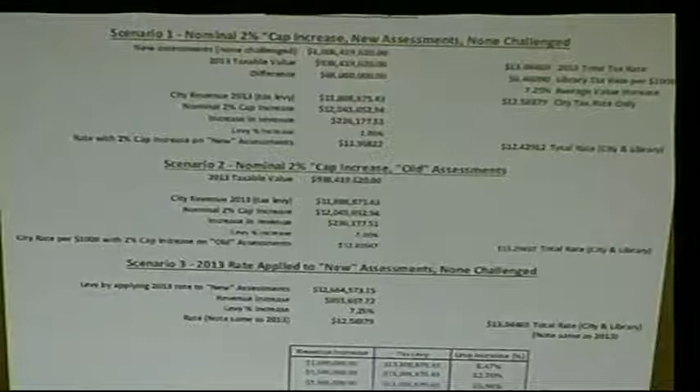So down below in that little table is what I'm saying. If we're looking to raise $1 million on revenue, the levy increase is going to be 8.47. At 1.5 million, it goes up to 12.7. At 2 million, it goes up to 16.94. And at 2.6, it goes up to 22.02.

So what the point is here is, granted your assessment is one part of the amount of taxes that you're going to pay, it really is quite significantly impacted by the tax levy, which in turn calculates the tax rate.

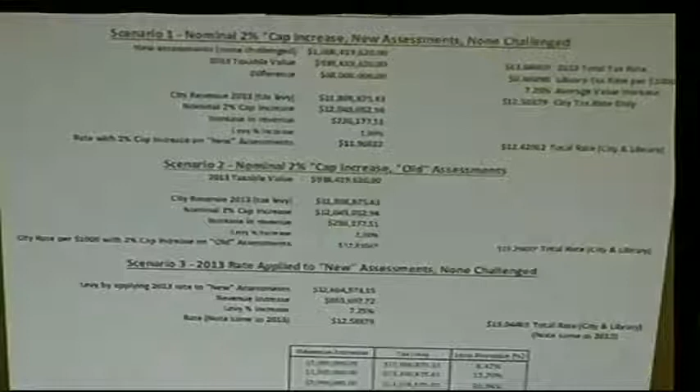Now I want to let everyone know that we know the city's an entitlement city, and that almost 51%, actually 50.9%, of the families are at low and moderate level income, as we discussed last week. This definition means that they're at 80% or less than the median income of the city, and I want people to have the opportunity to read it, to understand it, and to feel more comfortable about how these numbers are generated.

Councilor McCormick.

I'm not sure how to put this. I appreciate Councilor Rozika's, the work he put into the information that he just shared, but I just want to caution, I have a hard enough time myself trying to understand the tax levy and how it applies and the different things. I'm not saying that Councilor Rozika isn't totally accurate and knows what he's talking about, but a lot of the information that we get about median income and the levy and the tax rate and all the different things that go into this...

People that listen to this at home take this to heart, and they believe what we as city councilors say. They go through the weekend worried, sick about what they hear at these city council meetings. And if we're not absolutely, positively sure of what we're saying... trust me, I'm absolutely positive, sure what I'm saying is correct, I'm not arguing with you. I just want to make sure, like if I went to a doctor and the doctor gave me my medical review, I'd feel confident in that. But if I sat in the waiting room and the people in the waiting room talked to me about my medical condition, I wouldn't feel quite as confident about it, even though they were well-intentioned and had my best interest at heart, like I'm sure you do.